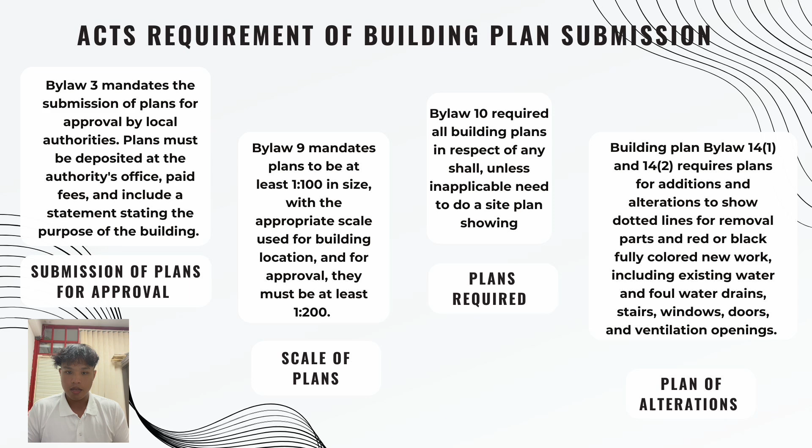Next, according to bylaw 10, the plans need to show necessary details such as the lot number and section number of the building. In addition, the site must have road access and the street name on the plan. The plan must also show the size and area of the building as required by the local authority, as well as other required elements such as proposed drains, scale, north point, all elevation drawings, and the floor plan drawings.

The requirement for details and calculation of structural plans is that, according to bylaw 16, one copy of the detailed structural plan together with structural calculation shall be submitted before the commencement of construction. A detailed structural plan shall bear a certificate by the submitting person as Form A, and that person should accept full responsibility. Besides, the requirement for specification in building plan submission is that bylaw 15 states that plans submitted for approval must include a specification of all proposed materials if so required by the local authority.

Next, a temporary permit is also required in building plan submission. In bylaw 19, a temporary permit may be issued by the local authority for certain purposes such as erection of sheds, erection of builders' working sheds or stores, and depositing building materials on the street.

However, bylaw 21 states that no person shall deposit any building materials in any street without a temporary permit as stated in bylaw 19. The person who has such a permit shall, at his own expense, cause such materials to be sufficiently fenced and enclosed until the materials are removed or otherwise made secure to the satisfaction of the local authority. Materials should be lighted during the hours of darkness, and a watchman should be employed to ensure this is done.

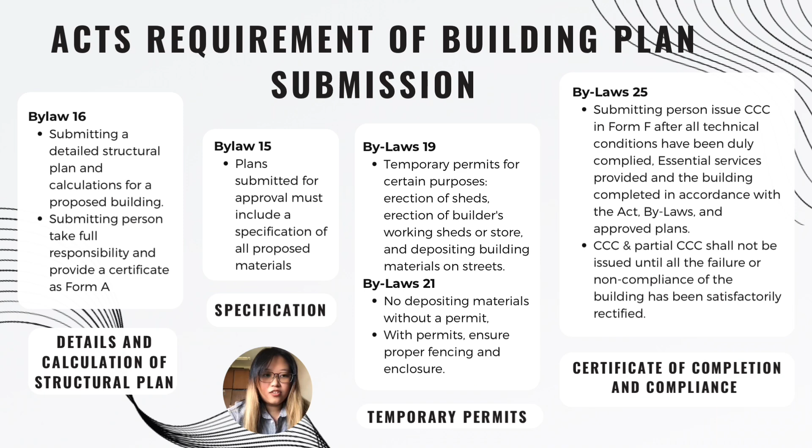Next, I want to talk about the partial certificate of completion and compliance. The Principal Submitting Person can issue a partial CCC for partially completed buildings, subject to local authority conditions for public health and safety. If the building lacks necessary services like access road, landscaping, parking lot, water and electrical installation, refuse disposal, and fire lift, no partial certificate will be issued. The certificate remains valid until the entire building is completed and a certificate of completion and compliance is issued in accordance with bylaw 25.

The document outlines the requirements for obtaining a certificate of fire safety, fitness, water supply, electrical power supply, and local authority confirmation. The Fire and Rescue Department requires the certificate for residential buildings, while the Department of Occupational Safety and Health requires the fitness certificate. Water supply confirmation is required from the Water Authority, sewerage clearance from a certifying agency, and electrical power supply confirmation from Tenaga Nasional Berhad.

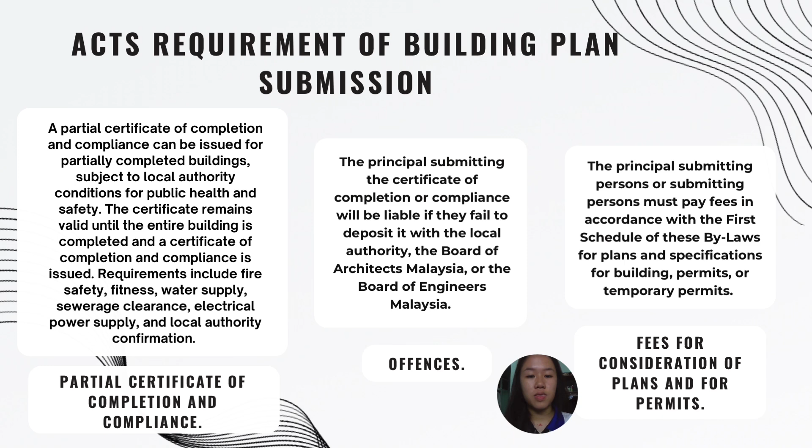Now I will proceed with requirement, condition, and procedure of certificate of completion and compliance.

In Malaysia, approving a construction plan is a crucial stage in the development process. This includes the application for development permission like the approval of the building designs, the approval of infrastructure plan, and other necessary procedures to ensure that the principal submitting person, PSP, in charge of the building complies with all laws and regulations. The second one is the permission to create such structure in compliance with a set of rules and regulations is what is meant to be granted by the approval of building plans.

Anybody wishing to start building activities like new construction or modification to existing structures must first obtain consent from the relevant local government as per the applicable provisions of the State Municipality Acts.

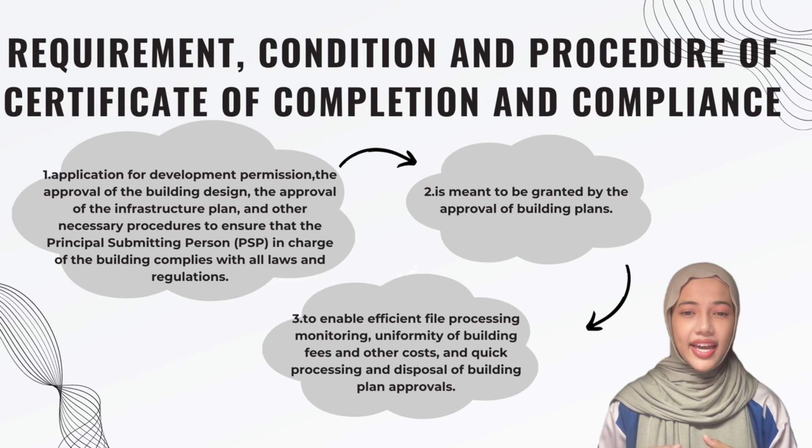The purpose of the building plan approval is to enable efficient processing, monitoring, uniformity of building fees and other costs, and quick processing and disposal of building plan approvals.

Next, with the implementation of the Street Drainage and Building Act 2007 on April 12, 2007, a new term, the Certificate of Completion and Compliance (CCC), was created. And then, the Certificate of Fitness for Occupation (CFO) is to be replaced by the CCC.

According to the Uniform Bylaws of the Street Drainage and Building Act 1974, the CFO was issued by the local authority under the Act 133 system. Next, the new CCC, which is based on self-regulation, is issued by the private sector. And last, the LAs no longer have much responsibility for the project, as the experts like architects, engineers, and building draftspeople do.

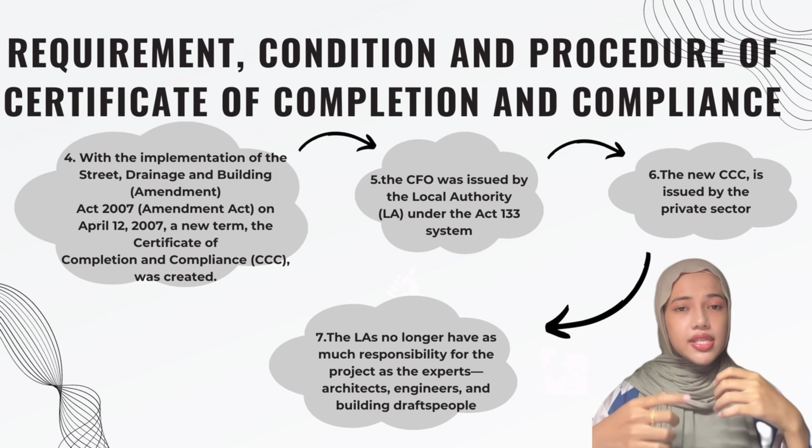Its goals are to improve home buyer protection, reduce local government red tape and bureaucracy, and boost the effectiveness of public offerings. CFOs will still be applied to ongoing projects, while the CCC only applies to new ones.

Next, I will present a topic of understanding the Certificate of Completion and Compliance, or CCC, issuance process for housing projects. My name is Eddie and I will be guiding you through each step of this process, ensuring that you have a comprehensive understanding of what is required, the conditions involved, and the procedure to follow.

Let's start with an overview of the entire process. The CCC issuance process can be broken down into four main steps: submission of the B form, commencement of construction, completion and inspection of the construction stage, and issuance of the CCC. We will dive into each of these steps in detail.

The first step is the submission of the B form. The applicant or the PSP must fill out and submit this form to the OSC, or one-stop center, counter. This form normally initiates the construction process and provides the necessary information to the building department and the PBT, which is the local authority overseeing the project.

Once the B form is submitted and approved, the next step is the commencement of construction. This marks the beginning of the building process, and the building department and the PBT coordinate these phases and ensure that all initial requirements are met before construction can proceed.

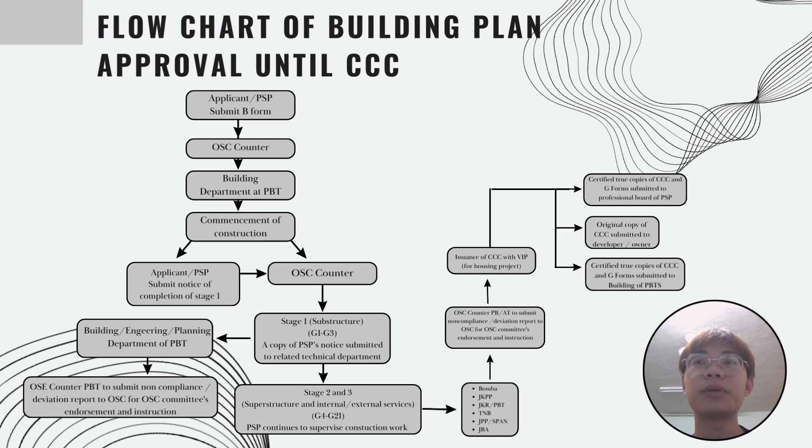In summary, the CCC issuance process involves several key steps, starting from the submission of the B form to the final issuance of the certificate. Throughout this process, multiple departments and authorities are involved to ensure the construction meets all required standards and regulations. Understanding this process is crucial for smooth and compliant construction projects.

Next, we are moving to the differences between the Certificate of Fitness (CF) and the Certificate of Completion and Compliance (CCC). Let's begin with some historical context.

The Certificate of Completion and Compliance (CCC) is a newer system introduced by the Street, Drainage and Building Act 2007. It was designed to replace the Certificate of Fitness for Occupation (CFO) under the Uniform Building Bylaws of the Street, Drainage and Building Act 1974, also known as Act 133. This change was implemented to streamline the certification process and address some of the challenges faced with the previous system.

The first major difference between CF and CCC lies in the issuing authorities. The CF certificate is issued by the local authorities, known as PBT, under the Uniform Building Bylaw of Act 133, while the CCC is issued by the Principal Submitting Person, or PSP. The PSP is responsible for submitting building plans and can be a registered building draftsman, professional architect, or professional engineer. This shift in authority is intended to decentralize the certification process and place greater responsibility on professional individuals.

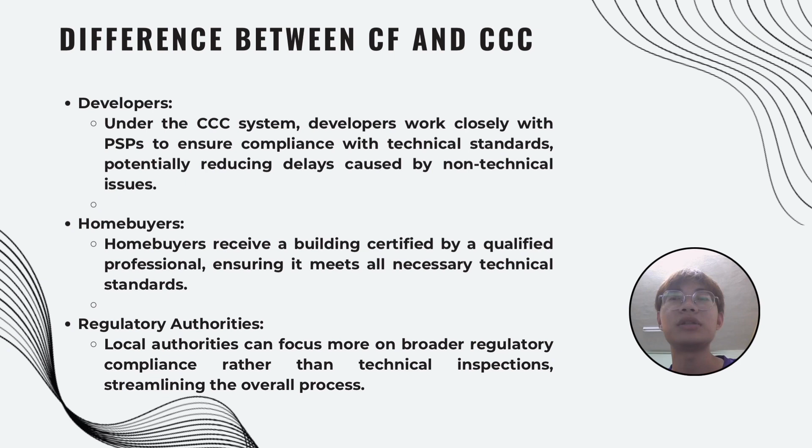In conclusion, the transition from CF to CCC represents a significant change in how building compliance is managed in the construction industry. By understanding these differences, stakeholders can better navigate the certification process and ensure that their projects meet all necessary standards.